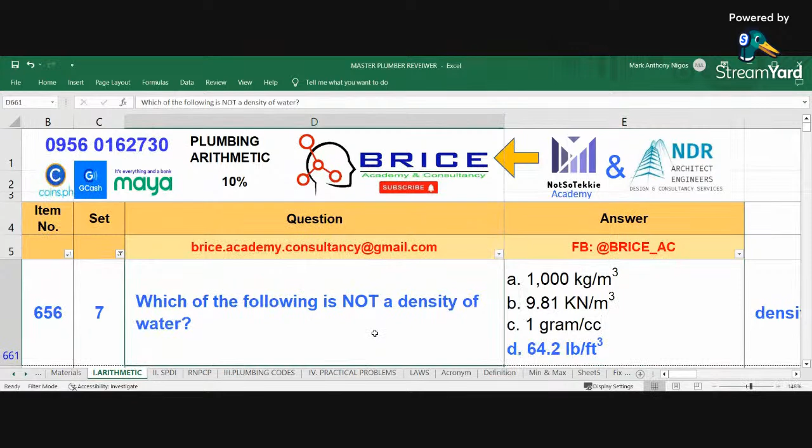Which of the following is not a density of water? The answer is, sa set 7 natin, ipakita ko. Answer is D, 64.2 pound per cubic feet. Ayan yung sagot, yung naka-blue, 656.

657. Now, this is the specific gravity of Mercury. Answer is 13.6. What is the specific gravity of Mercury? Answer is 13.6.

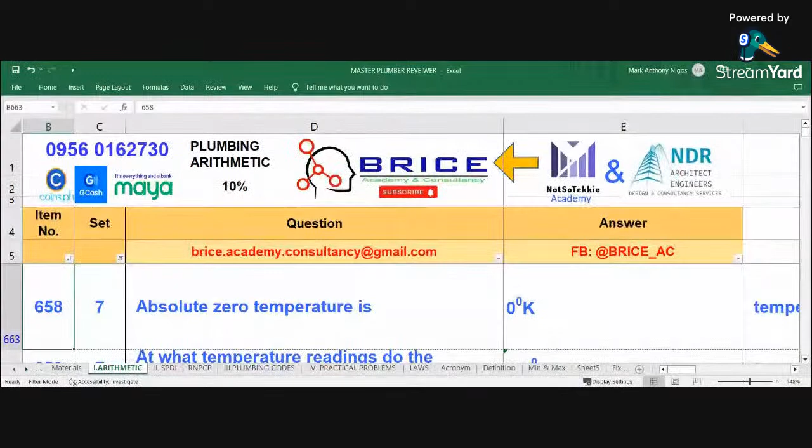658. The absolute zero temperature is what? The answer is 0 degree Kelvin. The absolute zero temperature is 0 degree Kelvin.

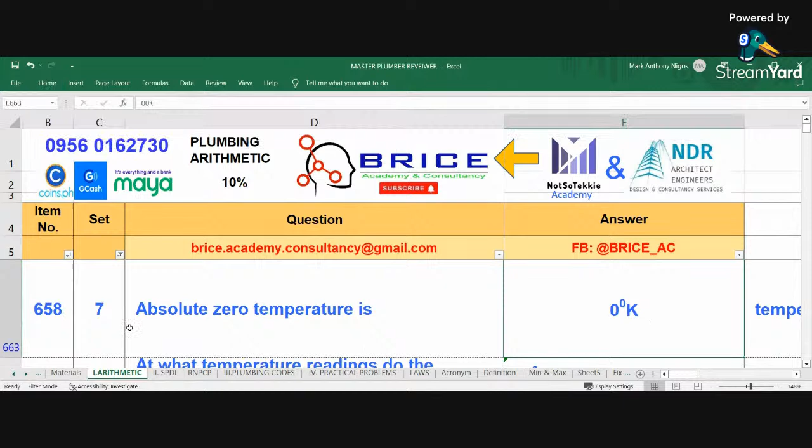659. At what temperature readings do the Fahrenheit and Celsius have the same value? The answer is negative 40 degree. May conversion naman yan eh, no? At what temperature readings do the Fahrenheit and Celsius have the same value? The answer is negative 40 degree.

660. Dense condition of water is at what temperature? The answer is 4 degree. Dense condition of water is at what temperature? The answer is 4 degree.

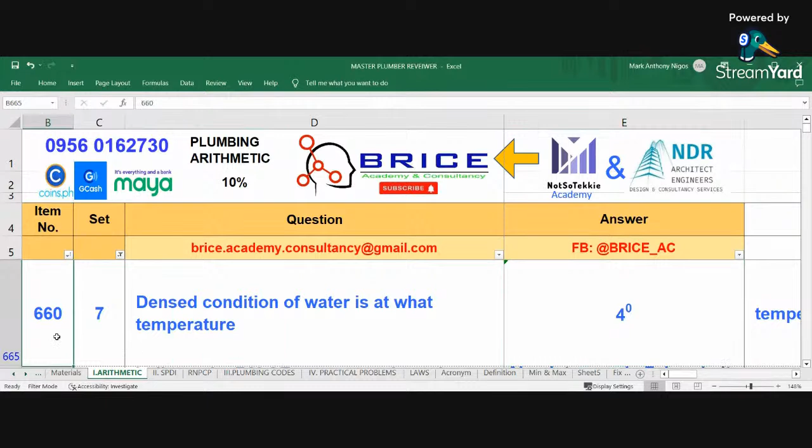661. Indicate the false statement about the temperature. The answer is: absolute zero in Fahrenheit scale is negative 273 degree. Yung pinaka-false statement niya, no? Indicate the false statement about the temperature. The answer is absolute zero in Fahrenheit scale is negative 273 degree. Dapat true pala yan kasi hindi siya false. Tama.

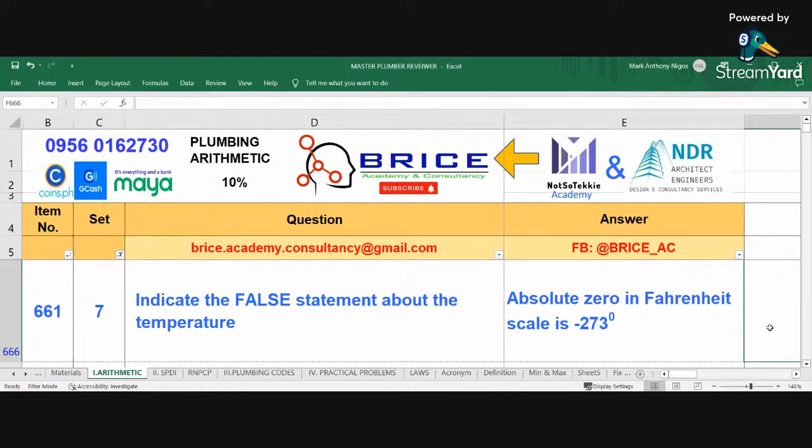661. Ibang choices eh: boiling point of centigrade scale is 100 degree - tama naman. Sumunod, B, Fahrenheit scale was invented by German. Absolute temperature scale is expressed in degree Kelvin.

662. Standard temperature, atmospheric pressure - answer is 760 millimeter mercury. Standard atmospheric pressure is 760 millimeter Hg.

663. Absolute pressure equals gauge pressure plus atmospheric pressure. Yan yung formula, no? Absolute pressure is equal to gauge pressure plus atmospheric pressure.

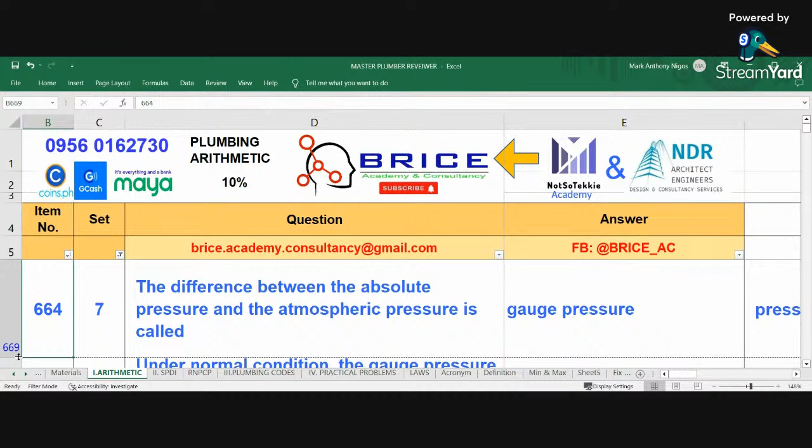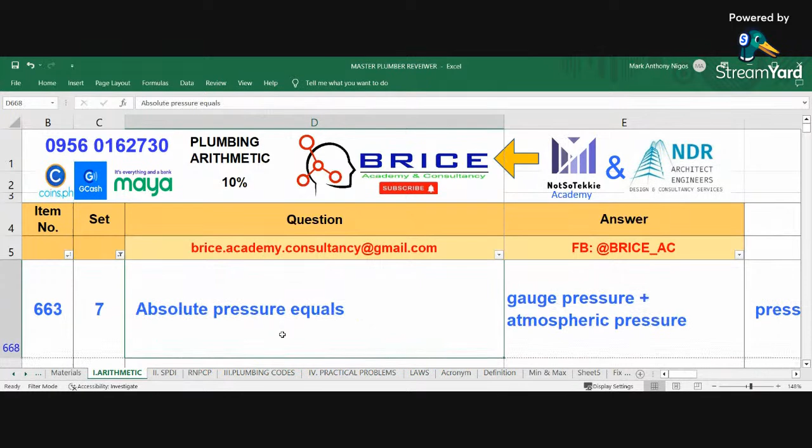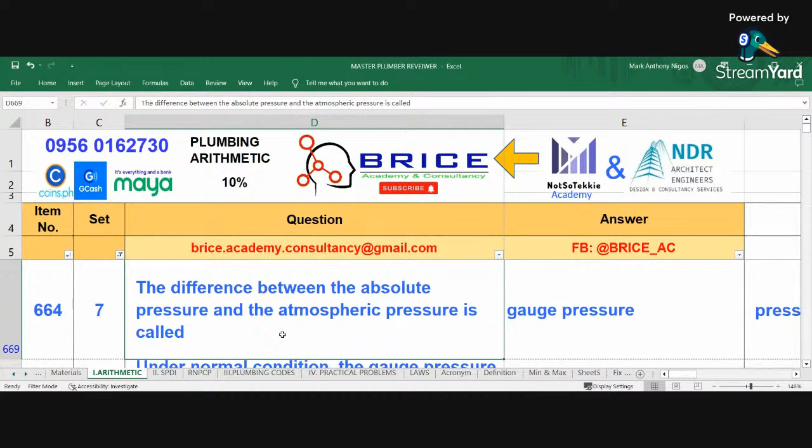664. Difference between absolute pressure and atmospheric pressure is called gauge pressure. So pag from this formula, na-compute na siya, no? Difference between absolute pressure and atmospheric pressure is called gauge pressure.

665. Under normal condition, the gauge pressure at water is equal to 0. The answer is equal to 0. Under normal condition, the gauge pressure at water is equal to 0.

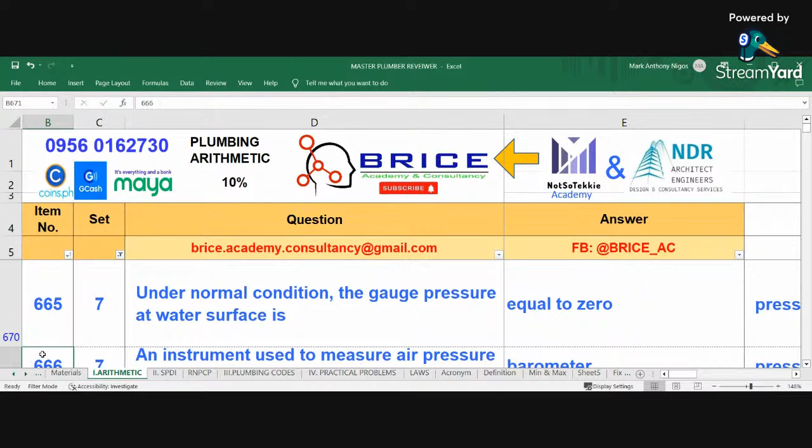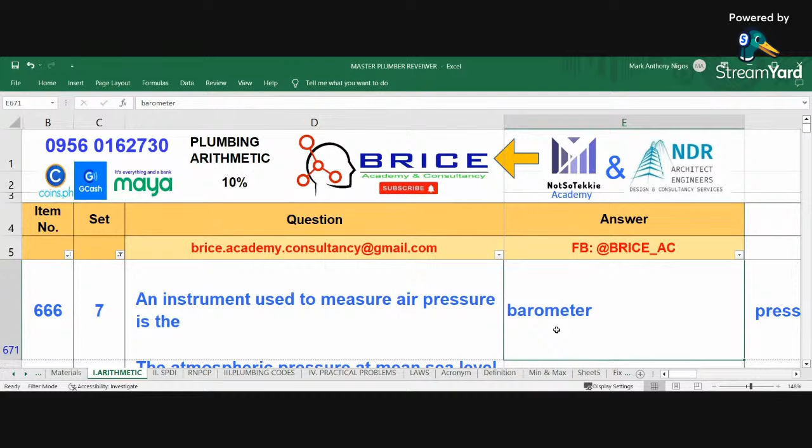666. An instrument used to measure air pressure, the answer is barometer. Natandaan din natin, meron sa atin naman, venturimeter.

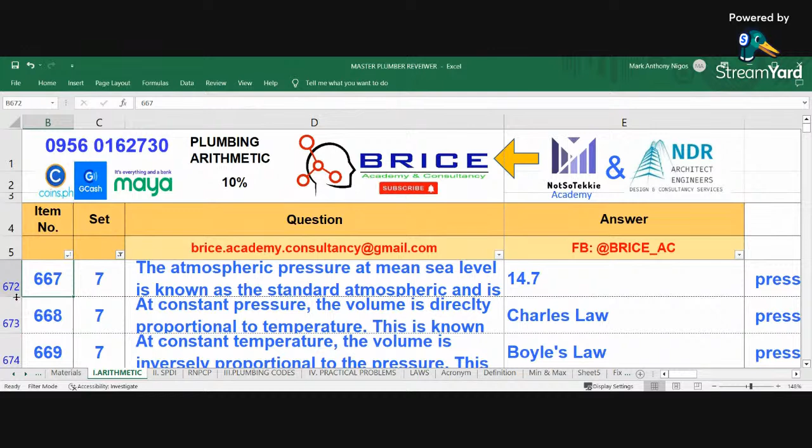667. Atmospheric pressure at mean sea level is known as the standard atmospheric and is equal to how many PSI? The answer is 14.7. Bakit ganon? Shuffle natin yan.

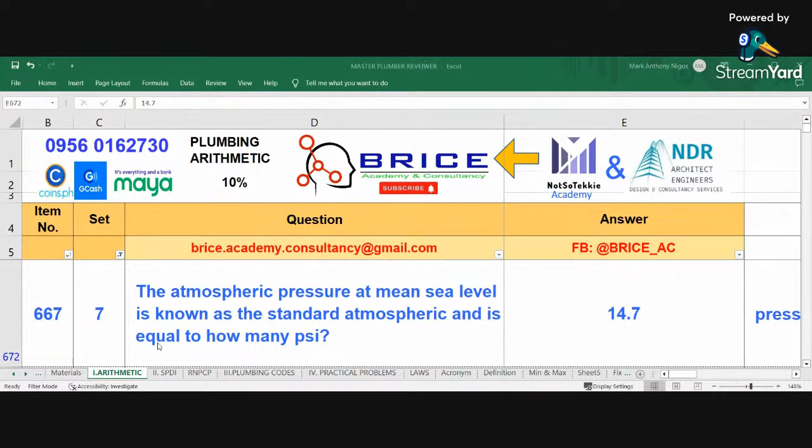668. At constant pressure, the volume is directly proportional to the temperature. This is known as Charles' law. Pressure is constant, the volume is directly proportional to the temperature.

669. At constant temperature, the volume is inversely proportional to the pressure. This is known as Boyle's law. At constant temperature, the volume is inversely proportional to the pressure. The answer is Boyle's law, one over P.

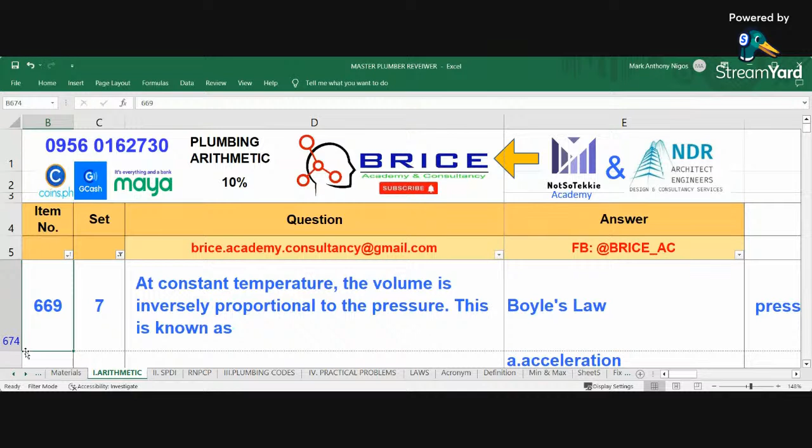670. All are scalar quantities except, the answer is acceleration. Speed, energy, and temperature are scalar quantities, and acceleration is not a scalar quantity.

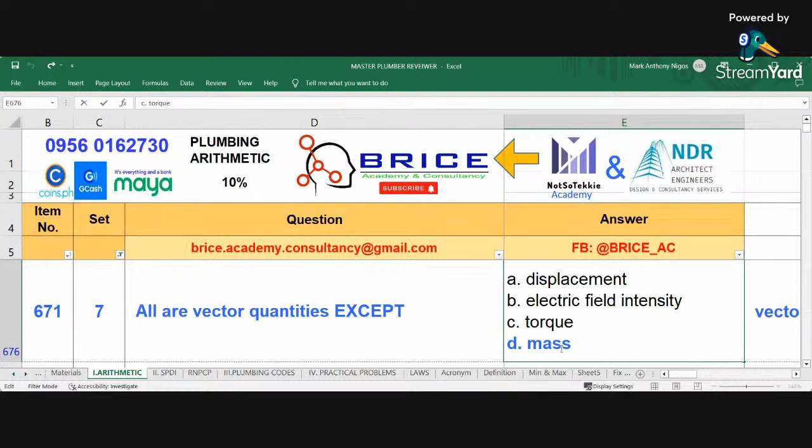671. All are vector quantities except, the answer is mass. Mass is weight over volume, no? Basta, mass is the weight of a person. Displacement, electric field intensity, and torque are vectors. Mass is not.

A vector is a straight line segment that has definite what? The answer is length, direction, and sense. A vector is a straight line segment that has definite length, direction, and sense.

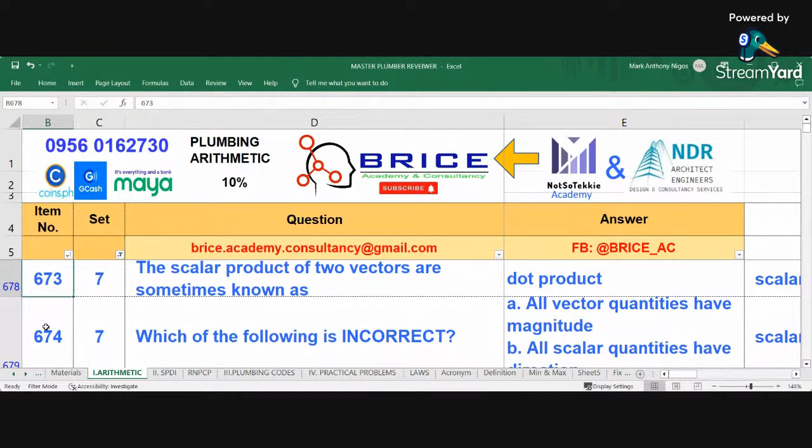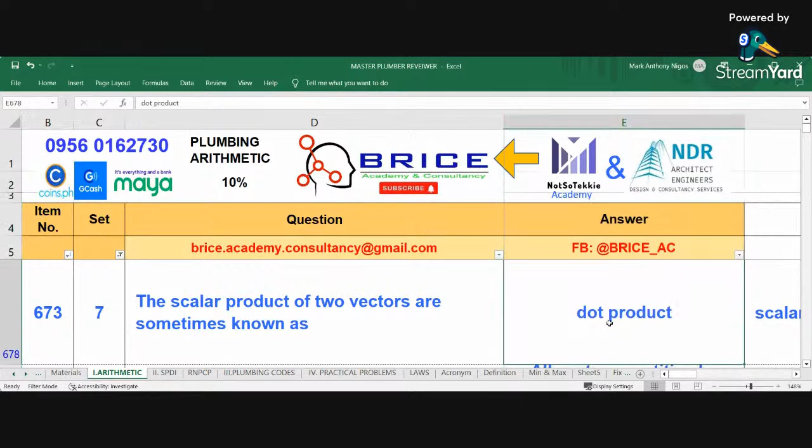673. The scalar product of two vectors is sometimes known as, the answer is dot product. The scalar product of two vectors is sometimes known as dot product.

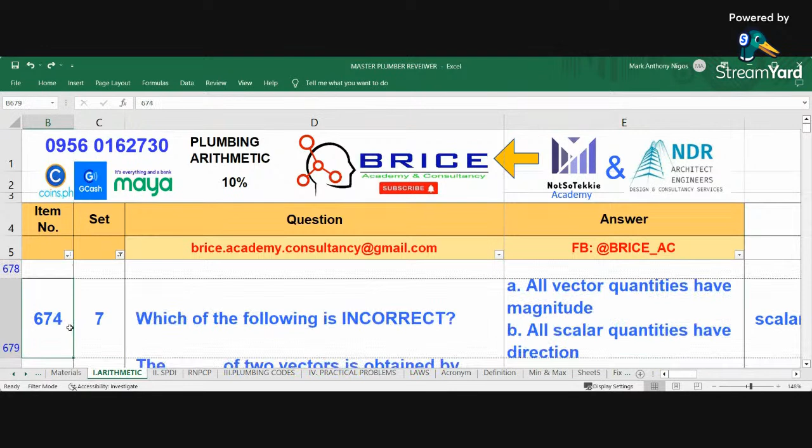674. Which of the following is incorrect? A. All vectors have magnitude. B. All scalars have direction. C. All scalar quantities have magnitude. D. All vectors have direction. The answer is B, all scalar quantities have direction.

675. The difference of two vectors is obtained by adding one vector to the negative of the other. The answer is difference.

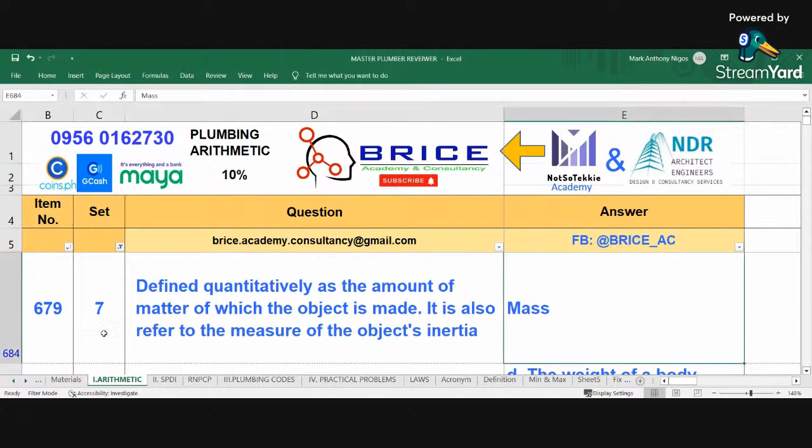680. Which of the following statements is true? I already removed the others.

I removed the choices. The answer is D.

680. The weight of the body depends on its location while the mass is independent of location.

The other choices: letter A, the weight and mass of a body depends on its location. The mass of the body is dependent on its location, and the weight of the body is dependent on its location. So the answer is: the weight of a body depends on its location while the mass is independent of its location.

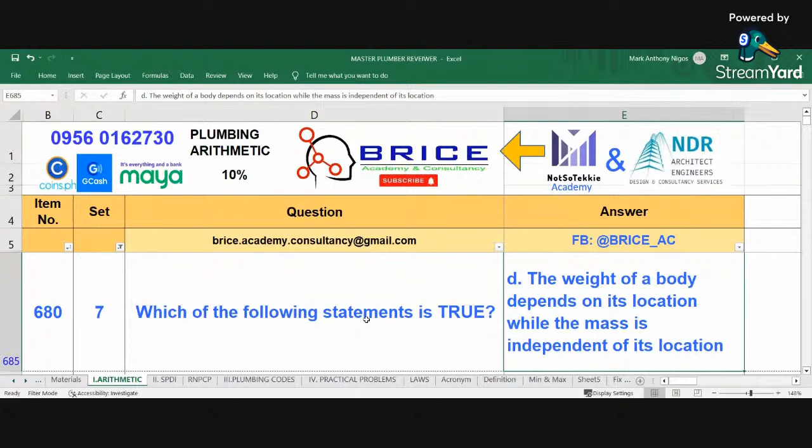681. Which of the following is true about the weight of an object? The answer is that it is the force with which it is attracted to the Earth.

682. This is often heard: the measure of inertia of a body, which is its resistance to a change in velocity. The answer is mass.

683. Quantitative measure of inertia. The answer is mass. A quantitative measure of inertia - the answer is mass.

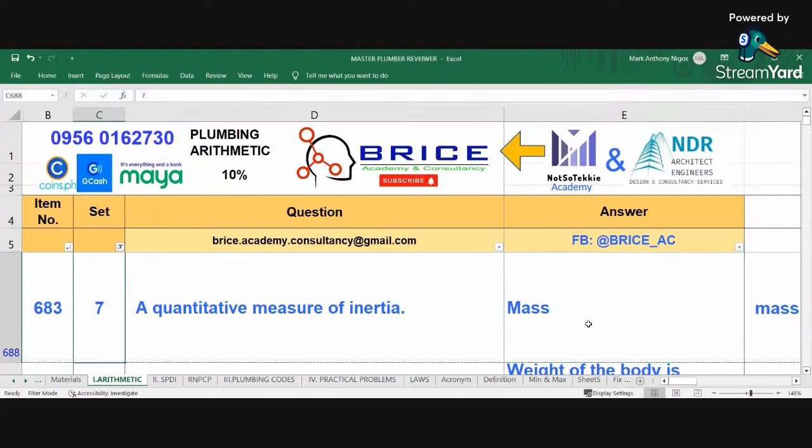684. Indicate the false statement. Weight of the body is always equal to its mass. Because weight equals mass times acceleration due to gravity, 9.81. So that's it - wait, that's wrong. I'm not sure, I forgot. Let's search it up first.

Commercial break. Mass of the body. Weight.

What is mass and its formula? According to Google, the mass formula is density times volume. No wait, mass - how do we find mass and weight of the body? This helps in finding the mass of the body based on the formula. It states mass is equal to the weight divided by the acceleration due to gravity. Hence we can say mass is W over g - oh, it's a relation.

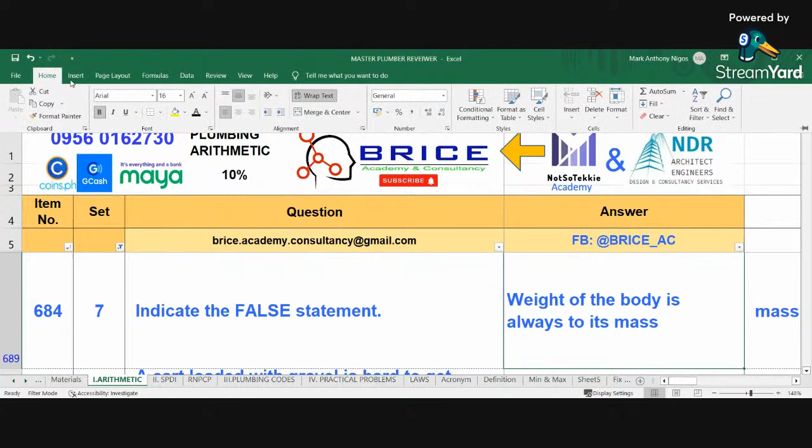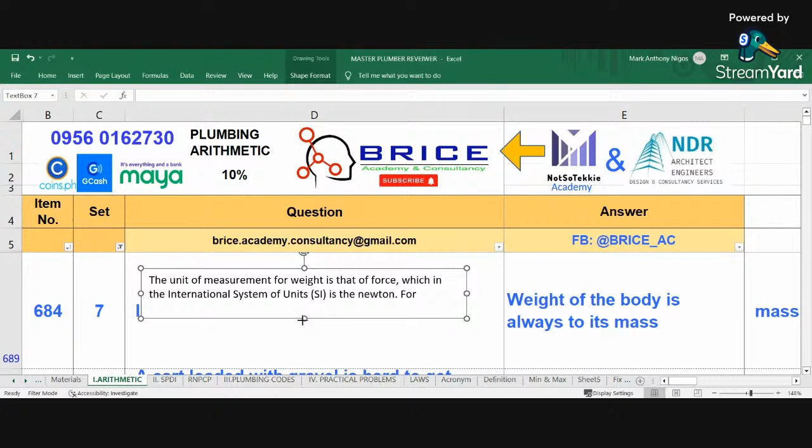Let's check this first - body weight. What do you mean weight? Wait, why is it like that? An object with a mass of 1 kilogram has a weight of about 9.81 Newtons on the surface, and about 1/6 on the moon. That's it. Wait, maybe you'll say I'm just guessing - for those who are fresh on this, it's familiar, but I forgot it. Here it is. The unit of measurement for weight is that of force, which in the international system is Newton. For example, an object with a mass of 1 kilogram has a weight of 9.81 on the surface and about 1/6 on the moon. So it comes out that for mass, weight is the mass of the body times 9.81, giving newtons.

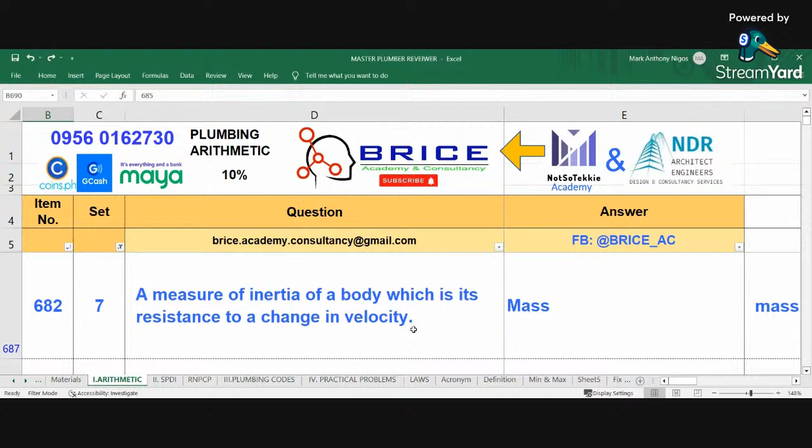685. A cart loaded with gravel is hard to start rolling because of its large mass. The answer is mass.

686. The mass to which a force of 1 pound will give an acceleration of 1 foot per second squared - the answer is slug. It's hot. The mass to which a force of 1 pound will give an acceleration of 1 foot per second squared - the answer is slug.

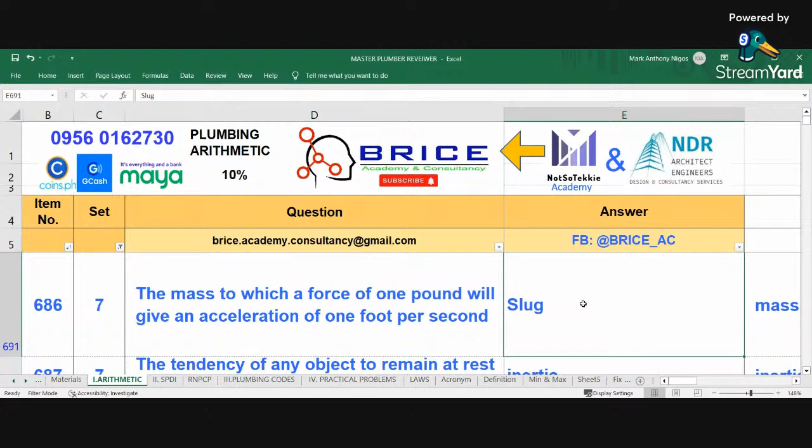687. The tendency of any object to remain at rest or to continue in motion is called inertia. The tendency of an object to remain at rest or to continue in motion is called inertia.

688. Any influence capable of producing change in the motion of an object is called force. The answer is force. Any influence capable of producing change in motion of an object is called force.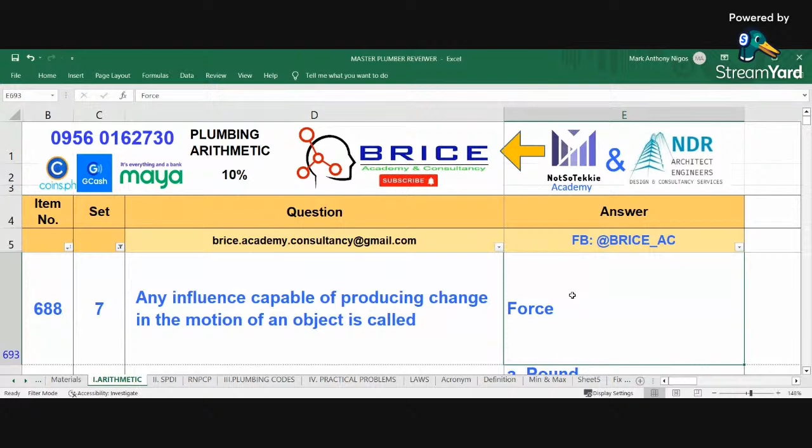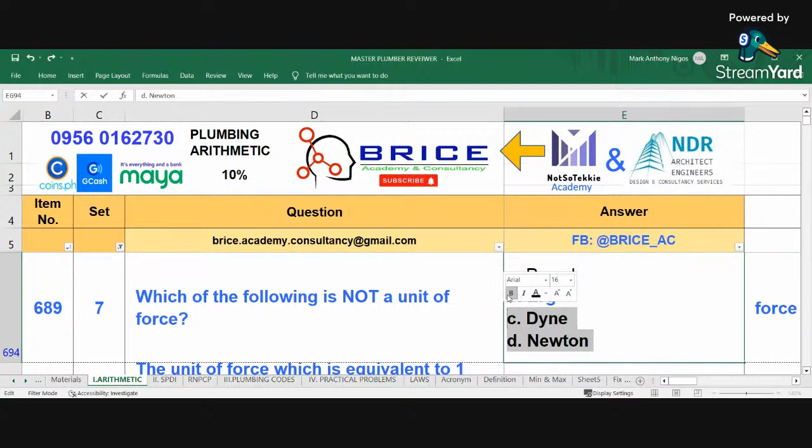689. Which of the following is not a unit of force? Pound, erg, dyne, Newton. The answer is erg, because pound is a unit of weight. Newton is also a unit of force. What is erg? That will be an assignment to look up.

690. The unit of a force which is equivalent to 1 gram centimeter per second square. The answer is dyne. 1 gram centimeter per second square - the answer is dyne. The unit of force equivalent to 1 gram centimeter per second square is dyne.

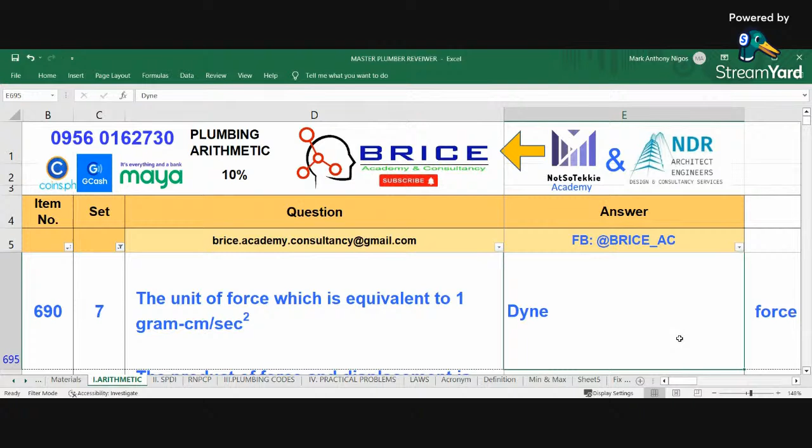691. The product of force and displacement is called work. The answer is work. The product of force and displacement is called work.

692. Which of the following is not a unit of work? The answer is slug - as far as I know, slug is a unit of mass, not work. Which of the following is not a unit of work? The answer is slug.

693. What is the SI unit of work? The answer is joule. What is the SI unit of work? The answer is joule.

694. The work done by external force on particles is equal to the blank of the particle. The answer is: change in kinetic energy. The work done by external force on particles is equal to the change in kinetic energy of the particle.

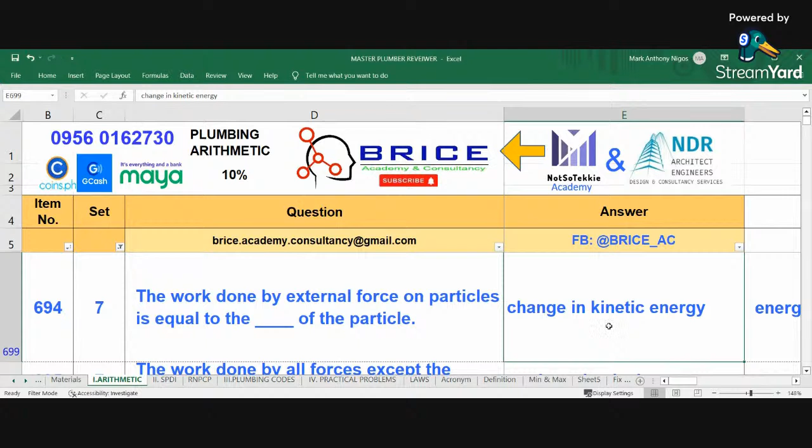695. The work done by all forces except the gravitational force is always equal to the blank of the system. The answer is total mechanical energy. The work done by all forces except the gravitational force is always equal to the total mechanical energy of the system.

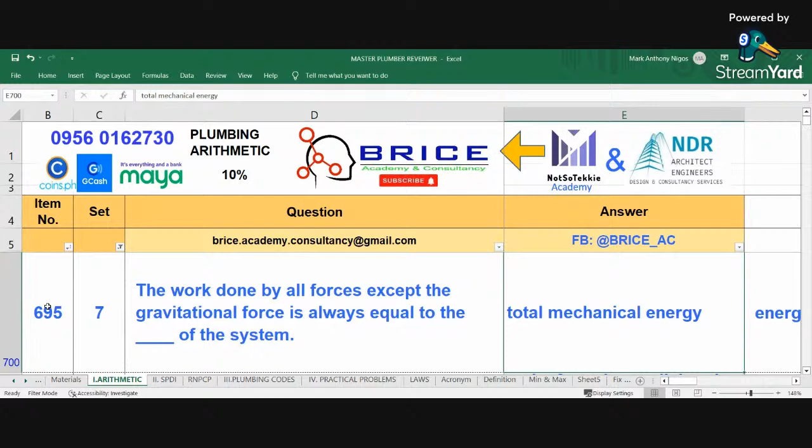696. There is no work done when blank. What is the answer? A, the force is parallel to the displacement. B, the force is perpendicular to the displacement. C, there is an angle between the force and the displacement. And D, all of the above. The answer is B, the force is perpendicular to the displacement.

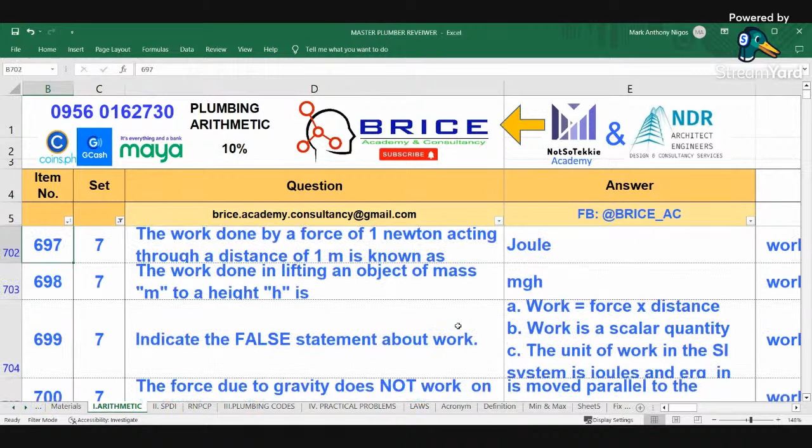697. The work done by a force of 1 Newton acting through a distance of 1 meter is known as... the answer is joule. The work done by a force of 1 Newton acting through a distance of 1 meter is known as joule.

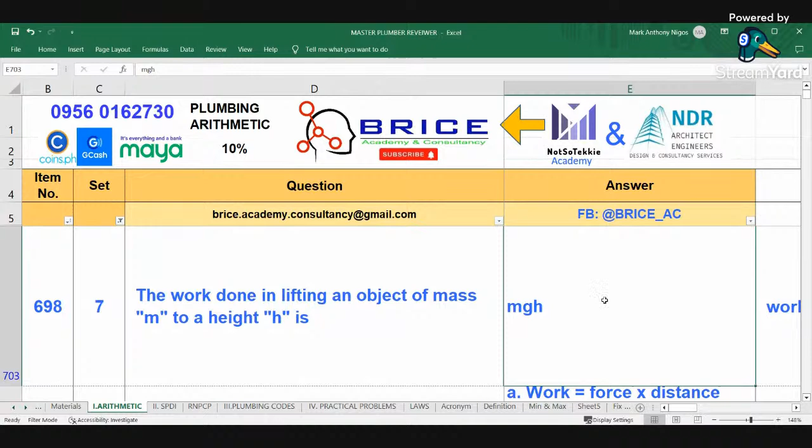698. The work done in lifting an object of mass m to a height h is mgh. The work done in lifting an object of mass m to a height h is mass times acceleration due to gravity, or g, times the height, or mgh.

699. Indicate the false statement. A, work is equal to force times distance. B, work is a scalar quantity. C, the unit of work in the SI system is joules, and erg in the English system. And D, work is equal to power times time. The answer is C. The unit of work in the SI system is joules, and erg in the English system.

And the last question for this session: the force due to gravity does not do work on objects that are moved parallel to the surface of the earth. The answer is: moved parallel to the surface of the earth. The force due to gravity does not do work on objects that are moved parallel to the surface of the earth.